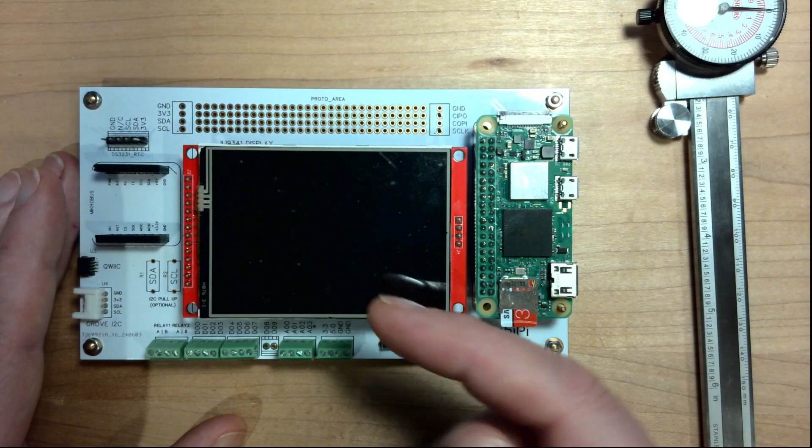One of the other things I really want to have in the final version is the thermostat wires that are coming in—24 volt AC coming from the wire in the wall—and I want to use that to power this. This obviously isn't powered by 24 volt AC, so for now we'll just use USB and run that down to a wall wart to power this in the first iteration. I can get it mounted, make sure everything works, and then develop a power transformer or power converter that I can mount up here that will take that 24 volt AC and convert it to 5 volt DC to drive everything. That might be one of the next videos—figuring out power.

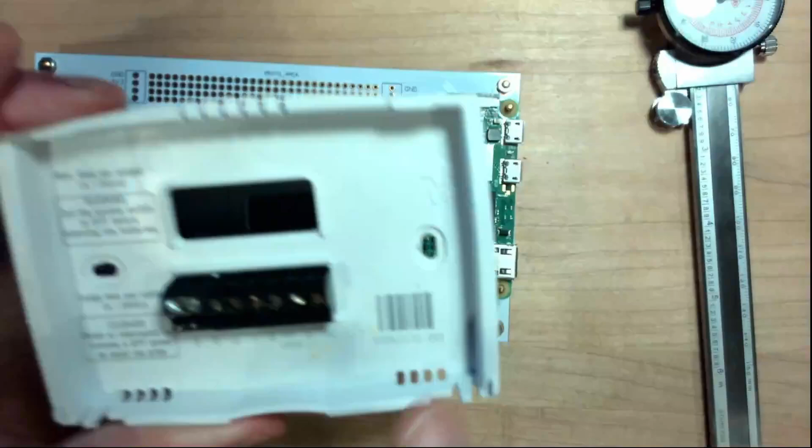But the point here is I'm not going to worry about power right now. We're just going to assume USB power, using these screw terminals. Now these screw terminals have to have wires that go through basically a hole in the back, since there's a hole in the wall that this runs through. Typically you've got a couple of anchors, and this just goes straight through the drywall, usually punched through with a drill or screwdriver or whatever. So we need something that can hold this, that will mount to these, and has a hole in place that allows wires to come up and into here.

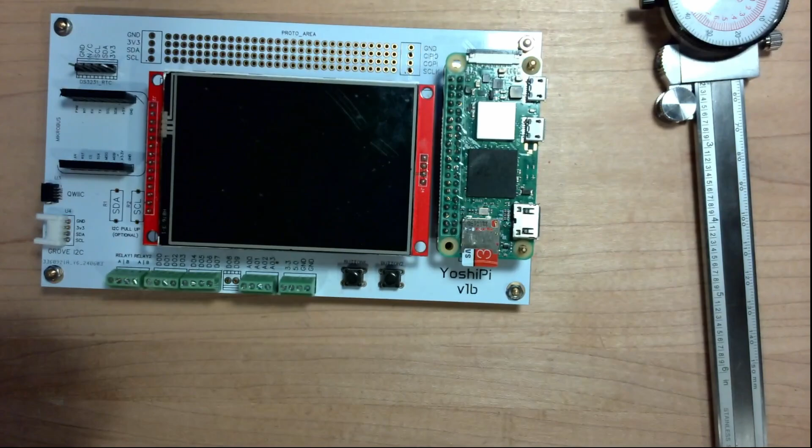We've got a few different requirements to meet, but otherwise not a whole lot. One thing to think about is the way this works: it gets mounted to the wall, and then you take the thermostat and it snaps in. It's got pins that bayonet into these connectors. So you mount this, and then you can just walk up and slide this on. Obviously I don't have that kind of connector here, so we have to have wires that loop up and hook into here.

If I'm mounting something onto something like this, I need to be able to put the screw holes in, but obviously they're going to be behind this board, so that won't work. So I have to build something that I can mount to the wall, and then this will mount into it after the mount is on the wall. That's a little bit of a challenge.

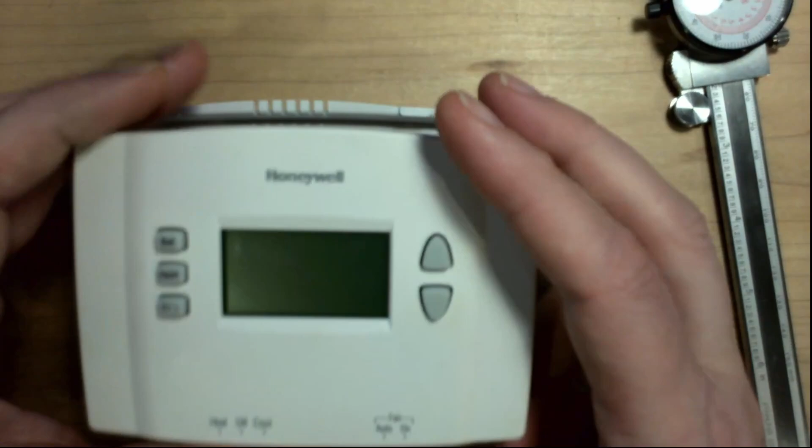Since this is a prototype, we don't need to do a full enclosure and face. I'm not worried about that because there's no point spinning all of that if we then turn around and make a smaller board. Really all I need is a backplate board that holds this. Yes, it'll be ugly and just hanging out there on the wall, but for a prototype that is just fine. So today we're going to do the 3D design work in CAD for a backplate that meets all of those requirements. Let's enumerate them real quick.

Just a backplate. It needs to have mounting holes at this standard configuration distance. I am going to go horizontal because I'm designing this thermostat horizontal. Though it would be interesting if you could make it so it could go horizontal or vertical, so the user could decide how they want to mount it and use configuration to rotate. Constantly thinking of new requirements for this. But for this one: holes for horizontal, a hole for the wires to come through, and some way for the backplate to mount to the wall, and then this to mount to the backplate.

One other thing to consider is this is just flat. Obviously it's on standoffs right now, but if I took those standoffs off I can't just mount it right to the backplate because wires have to come up and around. So we need to have some space between this and the backplate, whether it's using these standoffs or something else, that is to be determined.

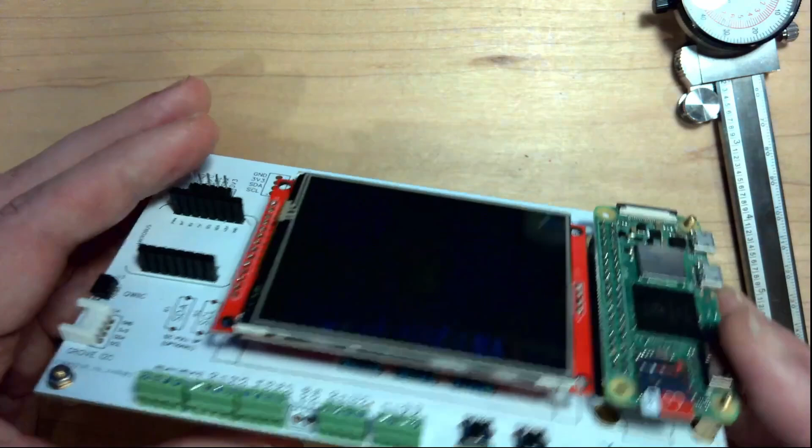So let's open up Fusion 360, which is my choice of design software, not for any particular reason other than I know how to use it.

The first thing we need to do is create what's called a sketch. So I'm going to create this sketch. I can open up the right view here. So I'm going to create a new sketch, and in fact it's already created this one called Untitled. You can't do much with it until we actually save it.

So I'm going to call this YoshiPi, YoshiStat, Proto, Backplane. All right, and it's going to save it off, and I can shrink this, I think. There's got to be a way to do that so we don't have to eat up a bunch of real estate with this. I know I can do it, I just don't remember how. There it is, okay, perfect.

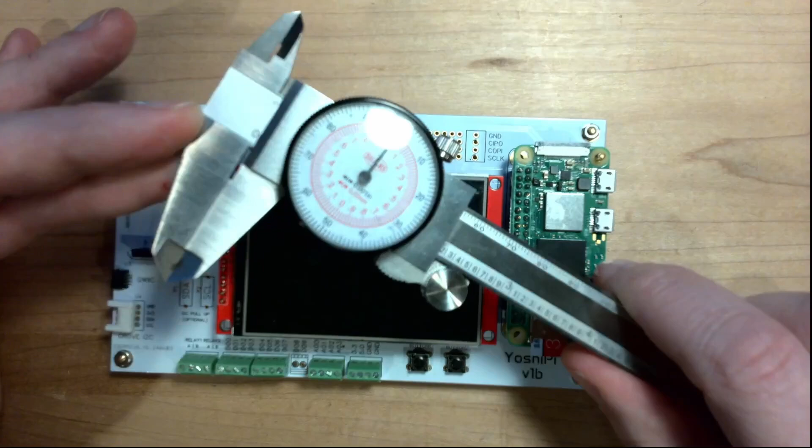Really the only tool I'm going to use here is a caliper, for basically all of the measurements that I run across. And I think that's really the only tool we're going to need today.

So I know that it needs to be the size of this. What I typically do is, now the temptation might be to just design the back plate here, but my experience is that I usually like to at least model the thing that's going into the enclosure or backplate first, and then design the enclosure around it. I do have some 3D designs for this hardware already done, but I'm going to not use those. I'm going to just design them here so you can see that process.

Now there's a whole bunch going on here, buttons and screw terminals and connectors. Those largely don't matter for what we're building, so I don't need to worry too much about it. I do have to come up onto these, so I might put these in, you know, the power and the relays and the digital outputs.

Maybe, maybe not. The reality is, if we have a backplane that doesn't extend up past this, I won't need to worry about it, but we'll decide as we go. Point being here that I'm going to design at least a very rough sketch of this hardware first, and then we will design the backplane around it.

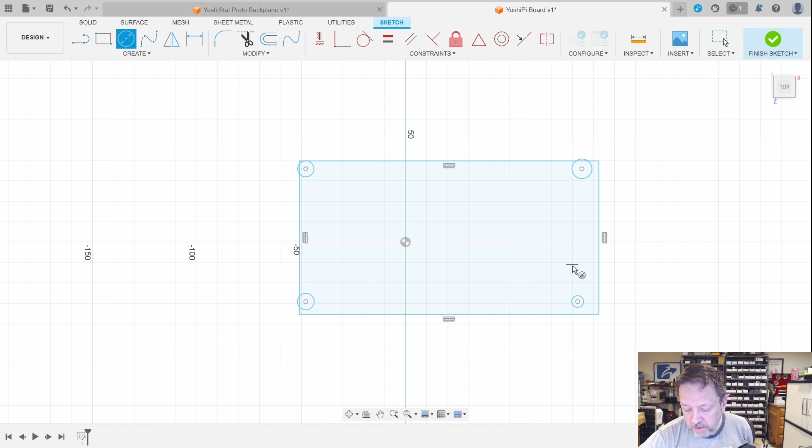So we've got some screw holes, right? And we actually have the Pi Zero, and we have the display, and we do have, oh, we can just put these in. Just broadly, we've got these connectors, right? So these are our shapes of what I think we care about for this. In fact, it's more than we care about. I'm not overly concerned about the display, but we can put it in.

Now I'm going to start putting some constraints onto this drawing that will make it look more like reality. So this is where measuring will help. In fact, trying to decide if it's worthwhile to have the camera showing measurements too. Why not? So hold on one second while I add that in.

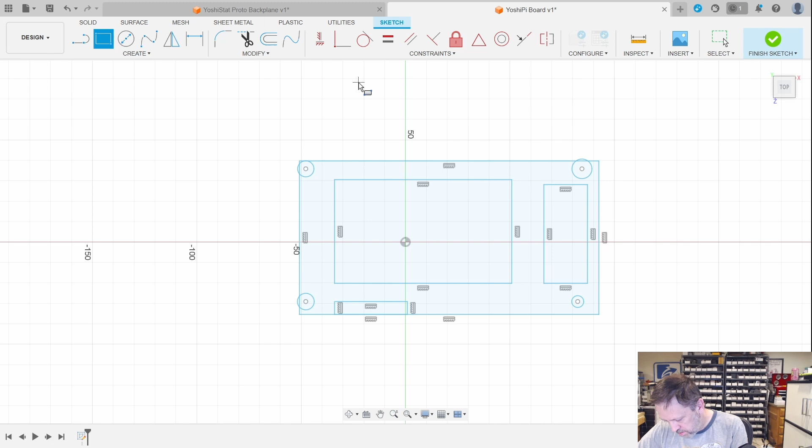And then I'm going to center this on the origin. So the origin is here. And if I center it, it's going to basically constrain it, and the outline will turn black so that it is in a fixed location. The easiest way I find to do that is just say the dimension from one edge to the center is the overall length divided by 2. And again, edge to center is the overall length divided by 2. And then that centers us.

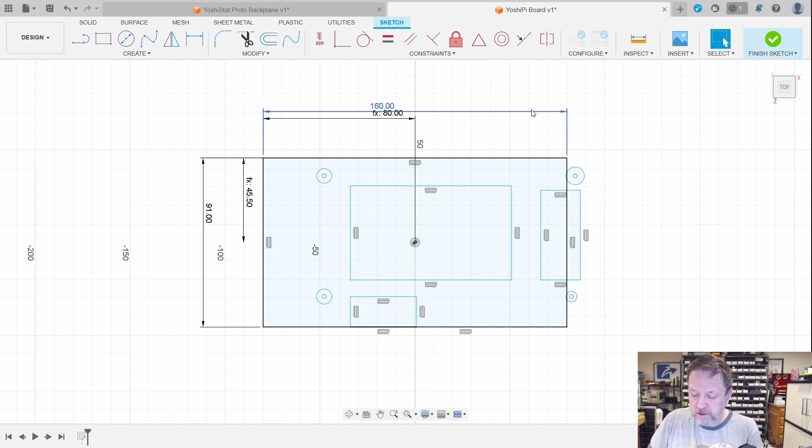Now the screw holes, that is a 4mm hole. So I can say that this is a 4mm hole, and I know that this one is the same as this one, same as this one, and same as this one. So all four the same size at 4mm, and then let's measure it to the edge. So that's 3 to the side of the hole, to the center of the hole, therefore it must be 5, right?

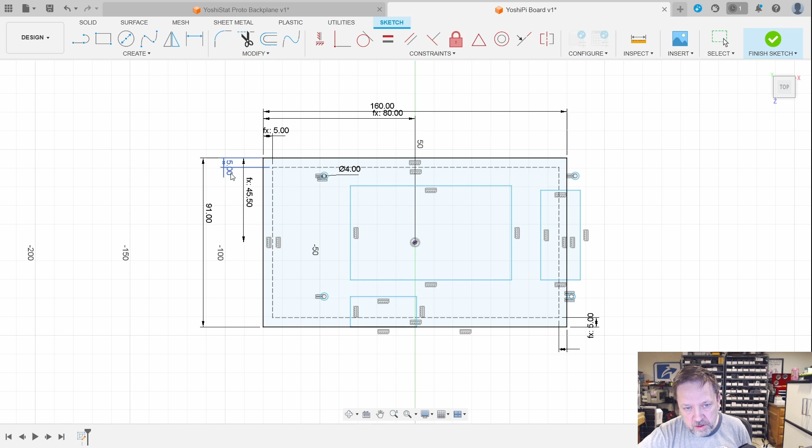So what I'm going to do is I'm going to put in another rectangle, but I'm just going to make it a construction line. Here. And now I can take these circles and put them right at those corners. There's a little bit of a zoom on what it is that we're looking at.

Next, let's deal with, let's do the display. This display is 55. Yeah, we'll call it 90.

Now, when we're laying out things like this, I've got multiple things that I need to lay out. Generally speaking, I like to lay them all out from the same edges. So I'll use one edge for X and one edge from Y. So basically, all my layout, I will come from here. So measure this direction to them and this direction. Because if I measure this direction sometimes and then measure this direction other times, what you'll end up with is if your initial measurements were off even by like a millimeter, you can end up with some weirdness in the middle when things get close to one another because you're measuring off of different edges. So if you always come off of the same edge, you're going to do a lot better.

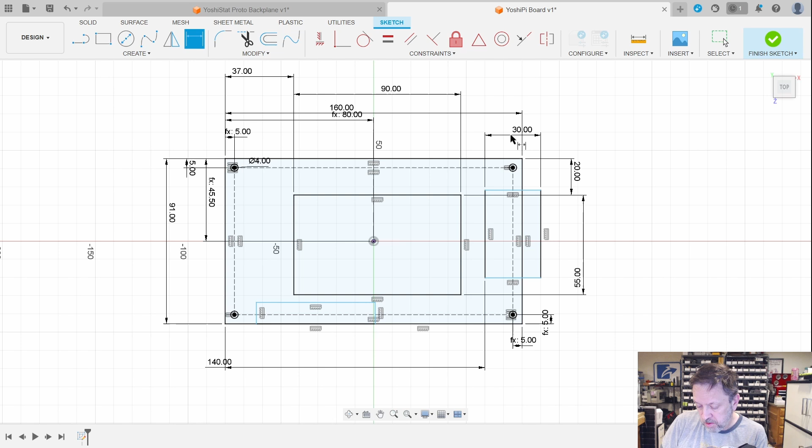Put the Raspberry Pi in here. And already I've got a measurement that's incorrect. Let's try this one again. That's better. And again, you could always go look up the actual dimensions for things that are common, like this Raspberry Pi. I'm sure the dimensions on this are published.

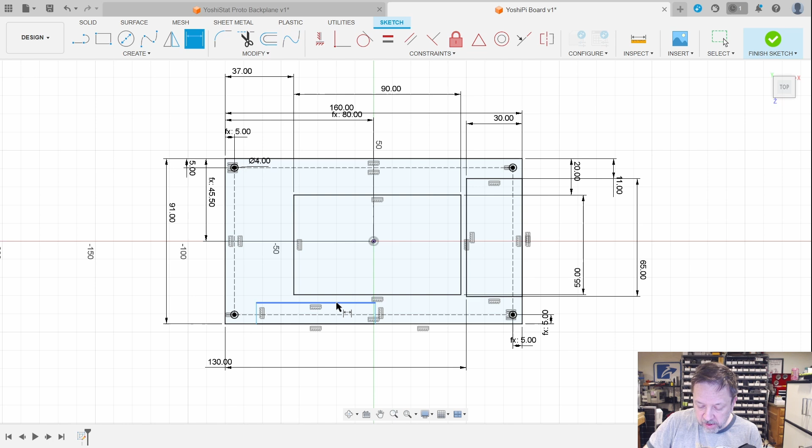This rectangle here is the block of screw terminals. You can see we've got several of them here. I'm just going to do this as one big block, because for what we're doing, it doesn't need to be really a refined model. All right, so I think that is all we actually need for doing this. So that's our sketch. Now, let's actually build the board.

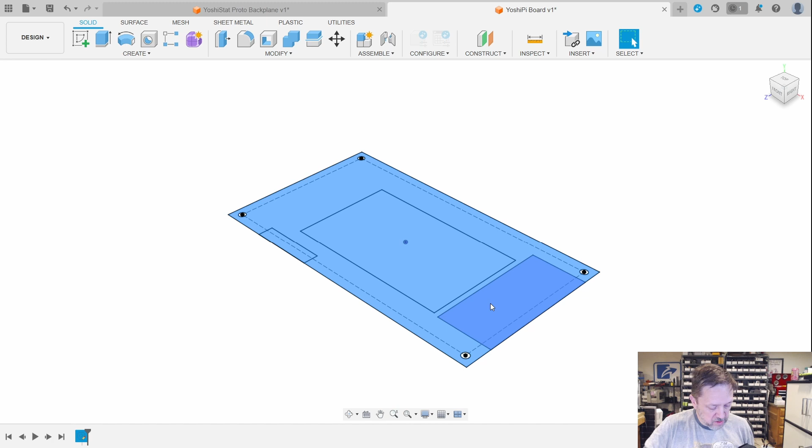So the board itself has a thickness of 2 millimeters. And let's just put these on. And you'll see that these are not going to be refined at all. So that looks like that's, say, 9 millimeters. So what I'm going to do is say this. We're going to come up 9 millimeters. And that's it. That's all I'm going to do.

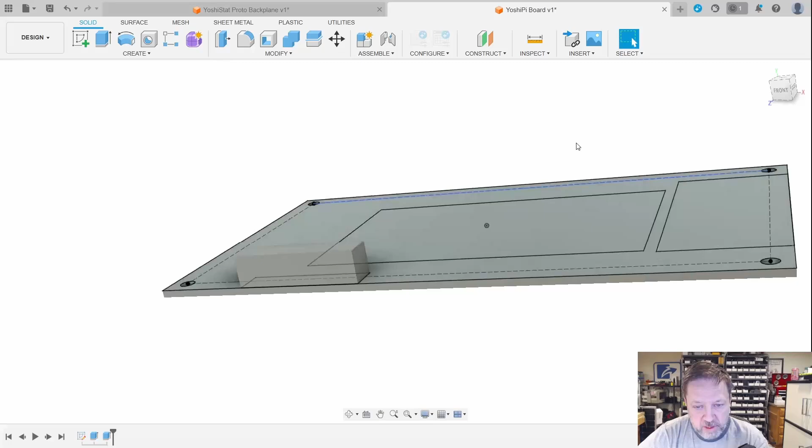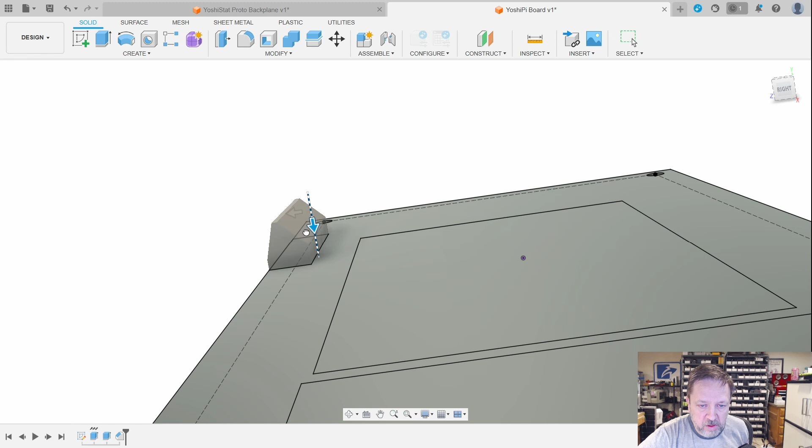Now, if you wanted to get somewhat fancy, you could do something like this. We could take this and let's chamfer it. And I could do a 2-direction chamfer. And it comes in, I don't know, maybe like that, and maybe like that. And we could do the same thing over here. Nope, not rounded fillet, chamfer. Something like that. Again, that doesn't really matter. The angles there, that's more refinement than we actually need for our model here.

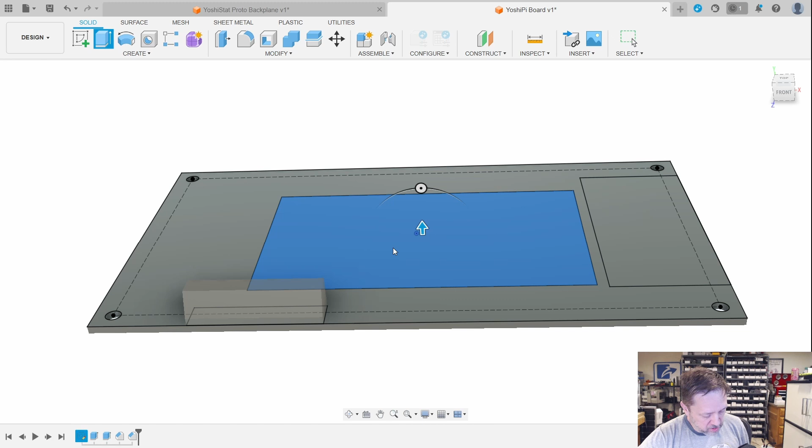Let's look at the display. The face of it is up 17. So I'm going to just come up 17. And the face of the Pi, we'll call it 10, close enough.

The measurements here don't need to be terribly accurate because, again, I'm not building any kind of an enclosure over the top of it. Really, the things that are important are things that we need for mounting. So the hole sizes, the distance between holes, the board size itself, the board thickness. Really, those are about all that we need to be terribly accurate on. So there's our board.

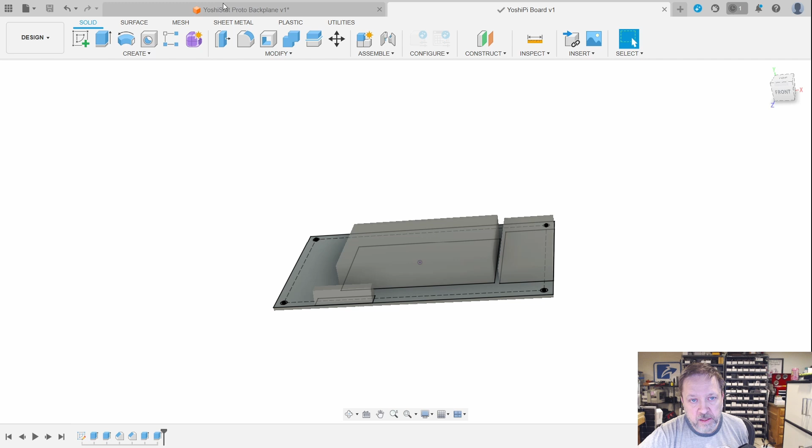I'll save that. Now I'm going to come back here, and this is our back plane. And what I'm going to do is come back over and show this, and I can take the board, and I'm going to drop it in. So now this board has been imported into this drawing, right? So now I can build my other stuff around it. So this is where our back plane is going to be.

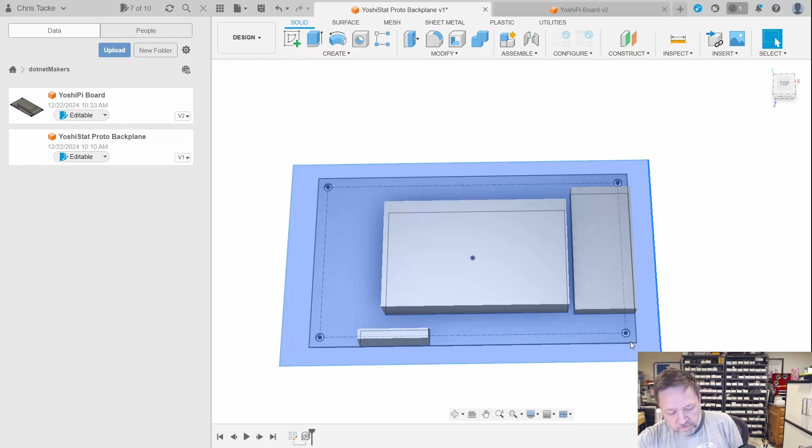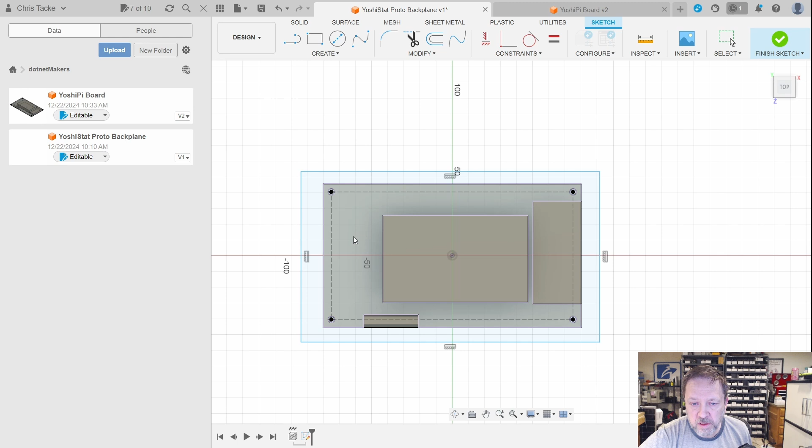So now let's edit that sketch again. What we can do is we can project onto it, and to do that, move some things around in the timeline. Let's go back and now edit the sketch. Okay, so what I want to do is project onto this board. Really, that's all we care about, right? We can project that. Then if I hide the board, it projects. It's missing this edge and things like that, but really it's got the 4 edges that we care about and the holes. So I think that's going to be good enough.

If we make that 5 millimeters, so it'll extend 5 millimeters out, that should work out just fine.

Oh, looks like the dog wants to go out and go to the bathroom. So I will be right back. If you have any questions, go ahead and throw them up into the chat, and I'll answer them when I get right back.

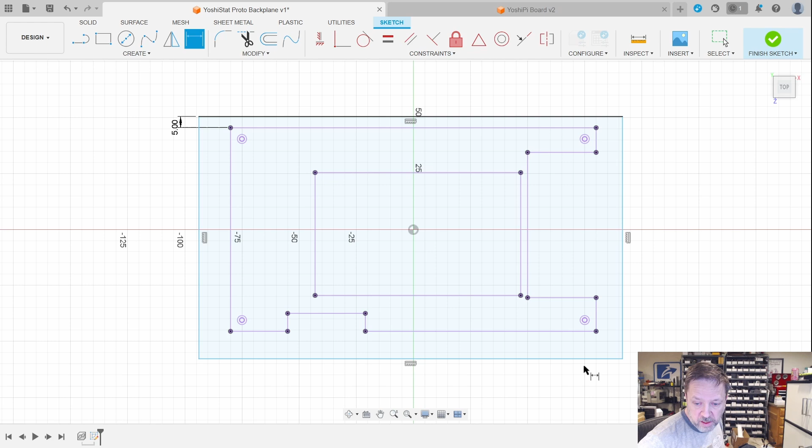All right, and we're back. Okay. What were we doing now? We were doing this.

Now I could make parameters for this whole thing so that I could adjust these, but this is so simple that if I need to change these, I can just change the actual dimension. What did I do?

Okay, so our backplane is going to be basically a 5 millimeter margin all the way around, bigger than the YoshiPi itself. Now I kind of want to have some sort of a ridge because just a flat piece of plastic is pretty floppy.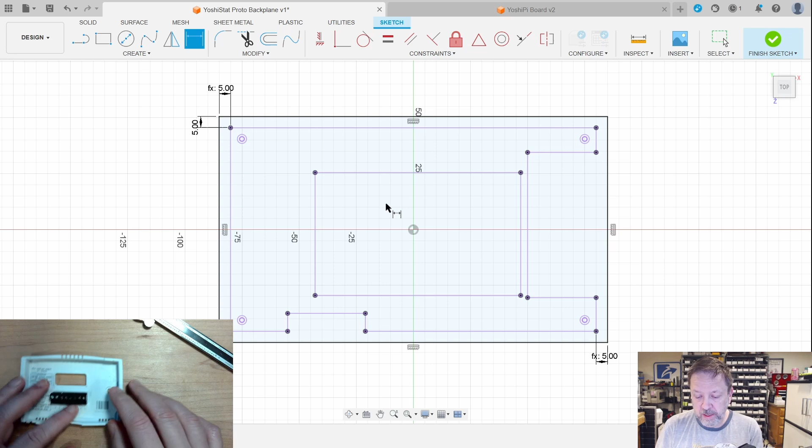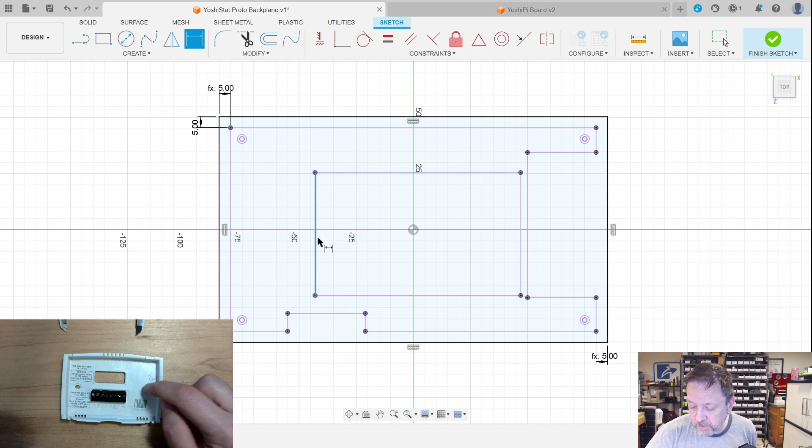Let's do a couple of things. First, we want to put the mounting holes. So let's actually come back and measure this. So we know that these holes, let's go center to center. Looks like it's 82 millimeters. Now you can see that these are ovals. They're not just a round hole. And it allows you a little bit of wiggle room to straighten things out.

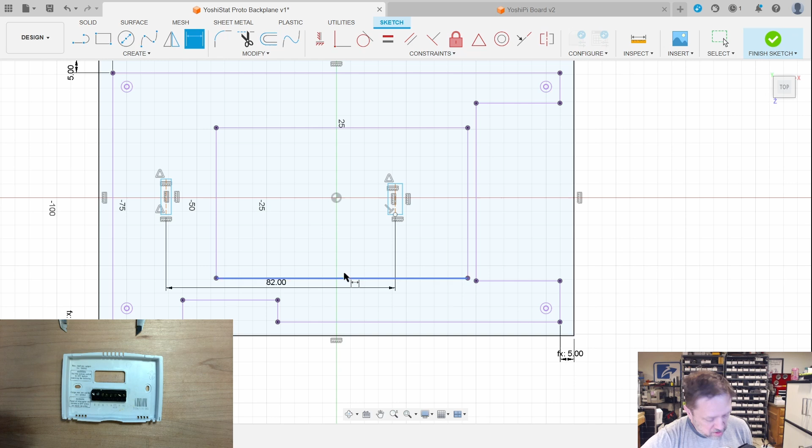And we're going to do the same thing. So I'm going to put these here, here, dimension. I guess we need to put a line in because it was center to center. And our dimension from this center line to this center line was 82 millimeters. And I'm going to center those. So from the origin to here will be that dimension divided by 2. So now we're centered across the middle.

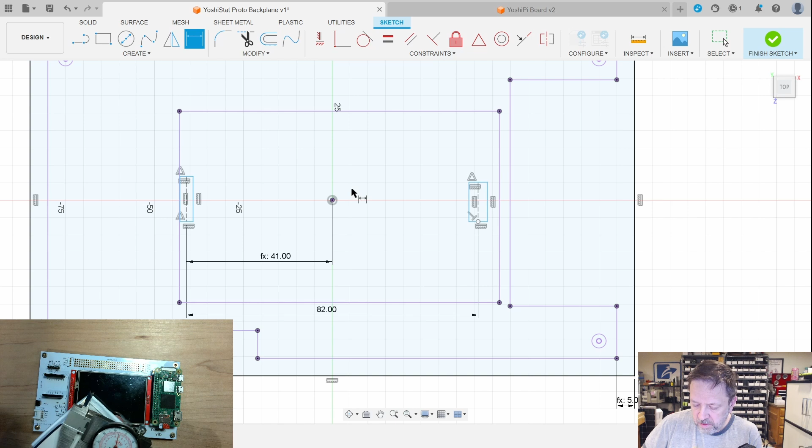Just quick sanity check. If I did that and I put the hole right at the edge of this, it's in the display. So that seems reasonable. All right. Let's set the size of those holes. I think this is actually probably a square with half circles. I'll show you what I mean there. But they're 4 millimeters across.

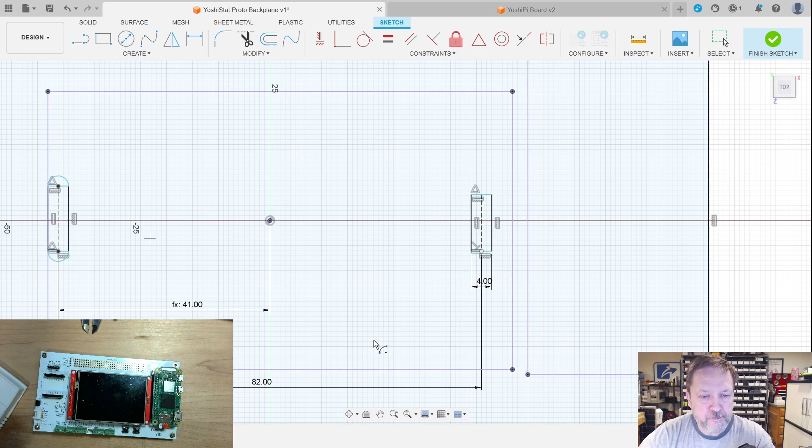So if this is 4 and this is equal to that. And now let's do an arc. I guess we could do a center point arc. Nope. Needs to be a standard line. And I think the dimension from here to here is probably the same as this. Now we need to put these on the center line.

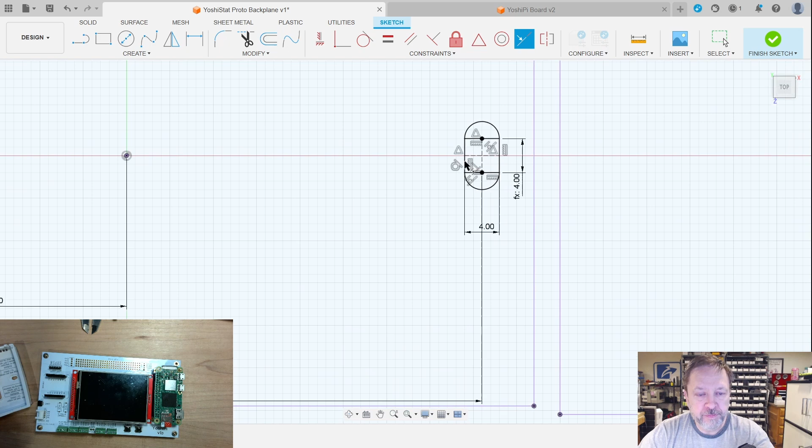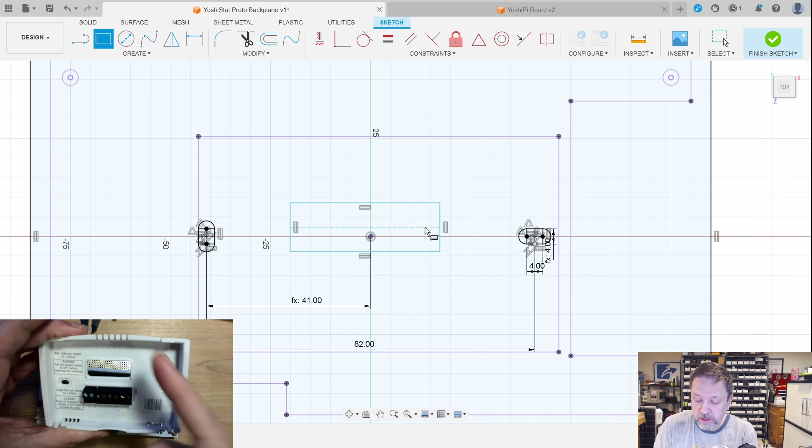I already screwed that up, didn't I? This one's horizontal and this one's vertical. So let's remove that one, and do them the other way. There we go. And we might as well make the hole for the wires here. You can see on this one, it's not centered. Actually, it's not centered either direction, but I don't think it makes a whole lot of difference. We could have this mount a little higher on the wall where the wires are lower, centered. Let's just center it. Why not?

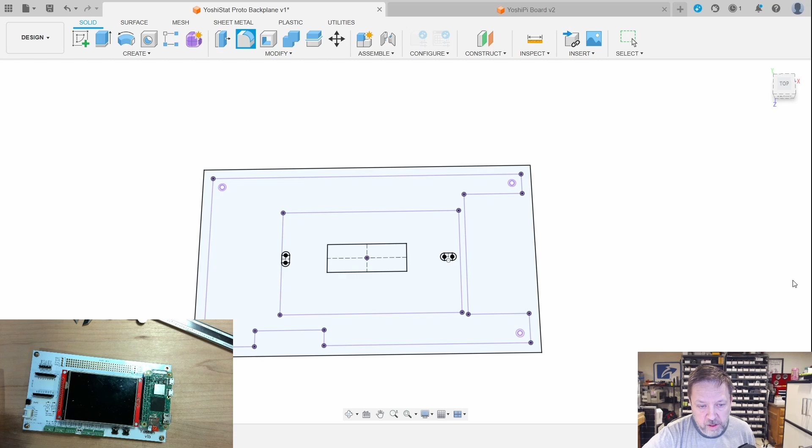Similar size hole. What is that, about 15? Yeah. 15 by 35-ish. Let's call it 15. Hey, let's just make it 40. And we can even be a little bit fancy here. And we can fillet those, right? Nope, didn't want to do that. I want to continue working on the sketch. So from here to here. Let's just do a 3. Yeah, 3.

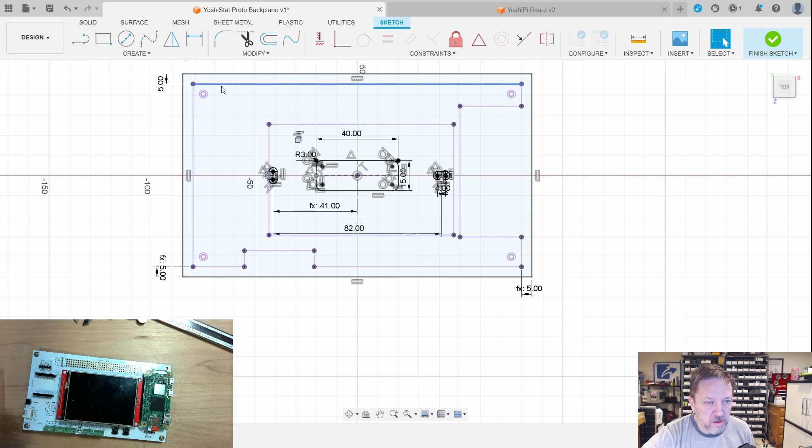Why is it allowing that? Ah, there we go. All right, so that gets us our hole for the wires, gets us our hole for our screws. Now we just have to figure out a way to mount our board to this. So what I was thinking is I almost want to have maybe some sort of slot that, let's say, the top fits into, and then we slide this down and it clips in. So we want some sort of a standoff to keep it up off the back, and that can be in all 4 corners, basically like these, but we'll just build that right into the enclosure.

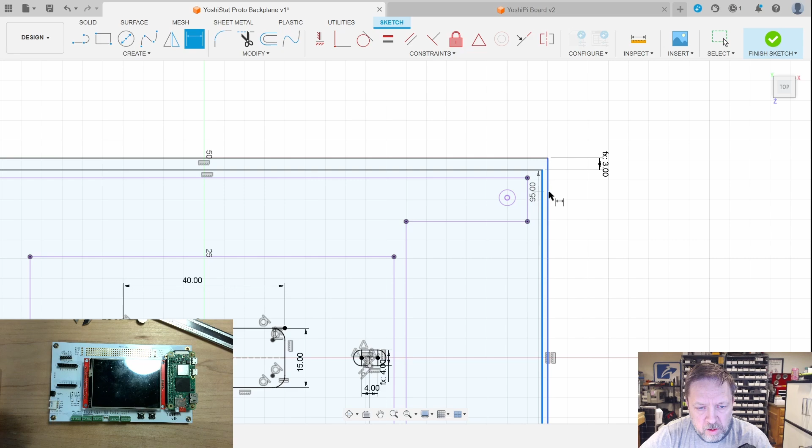So I guess we could put these into the enclosure with screws. A lot of ways we could do that, but let's just do this. I want to make a rectangle around the border to make it rigid. This will make a little bit more sense when I actually extrude it. Let's see. So from here to here, make that 3 millimeters. Why? Because of that one. All right.

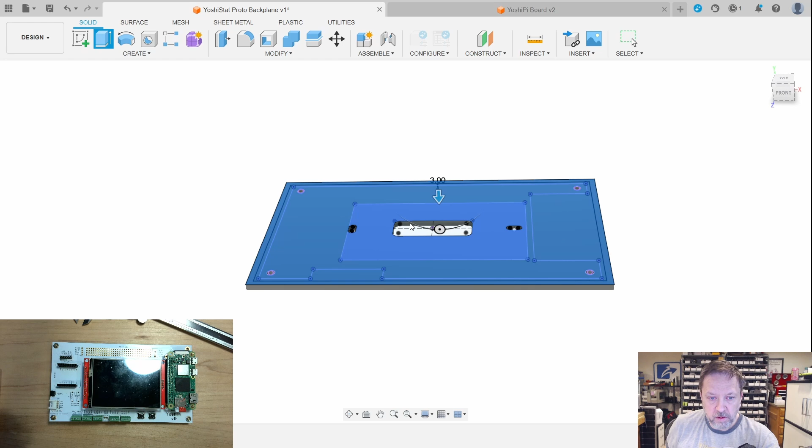So let's go extrude this just as we have it so that you get a feel for kind of what we have. We can do this in stages. So let's say we want to extrude this and make it 3 millimeters thick. So we kind of have a plate that looks like that. Now these holes, they don't necessarily need to be there. We could fill those in, but we'll worry about that as we continue this.

Then I want to take this one and I want to extrude it in the positive direction. Let's come up 2 millimeters just to start with. So you can see if I shut off that sketch, we have this ridge that runs all the way around now, right? And this will add some rigidity to the plate itself. Now, that is not enough. We know we have to have space behind the board.

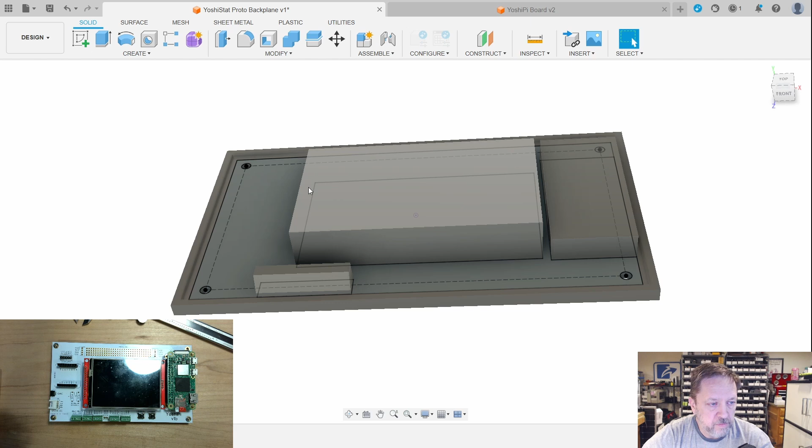And in fact, if we show the YoshiPi board sitting here, we know that we want it to be moved up, right? So in fact, let's move it to where we want it. Move the whole component. Come on now.

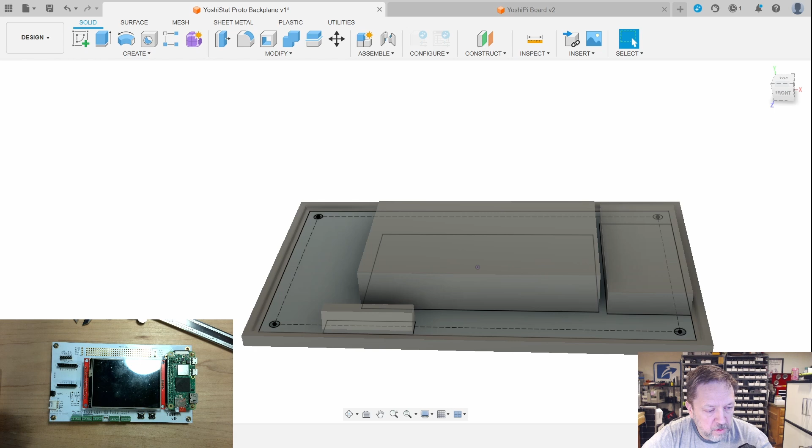Oh, interesting. So what it has done is it has merged our two bodies together, which I do not want. That's why I'm having trouble here. So if I come back to here, hide that.

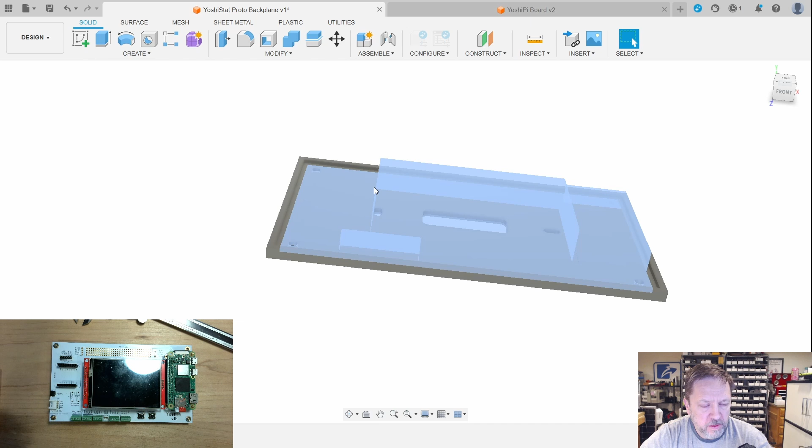Somehow I grounded it. Now I'm trying to figure out how to undo that. There it is. Okay, now let's try this again. I want to move that. There we go. That's what we wanted. So now I can move this up and down, right?

And really what I want to do is I want to move it, I think 0 is the faces of them combined. So up 2 will be sitting flat. And then we want to come up another 5. So that should leave us a 5 millimeter gap between the back of this board and the front of this, I think. Let's go take a look.

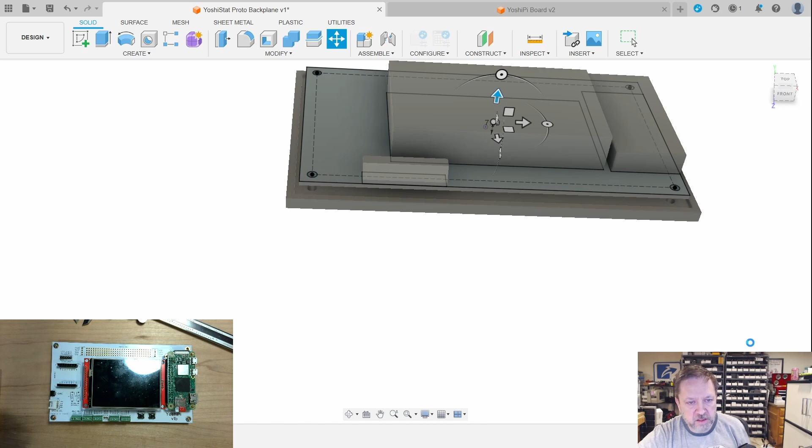We inspect from, say, this to this. It says, yep, it's a 5 millimeter difference between them. And 5 millimeters is plenty for those wires. All right.

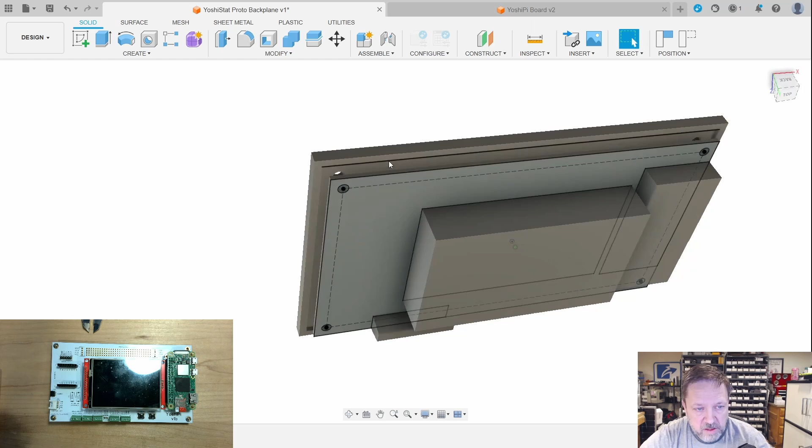So this is kind of what we're building right now. Now we have to have a way to attach this board to the back plane. I'm thinking a reasonable way to do this is if I had a slot or some sort of way that this upper edge could slide in, and then some flexible tabs at the bottom that would hold it in place. So let me kind of show you what I'm thinking here.

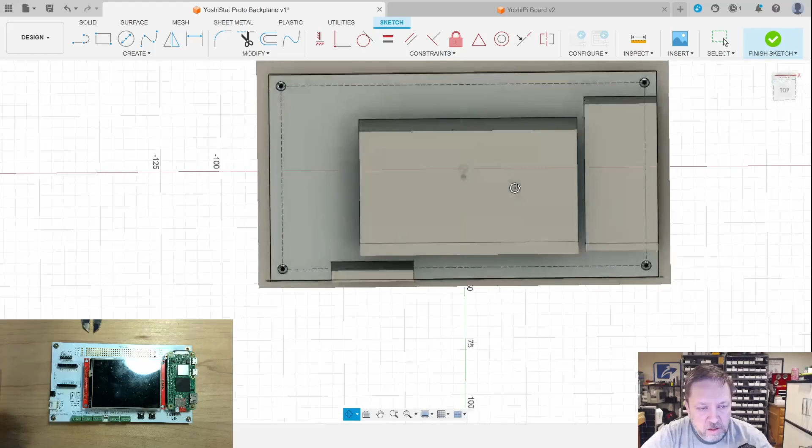Create another sketch just for this mounting. And then let's project this back plate onto it. And I want to project these edges. I do that, and then I hide all of these.

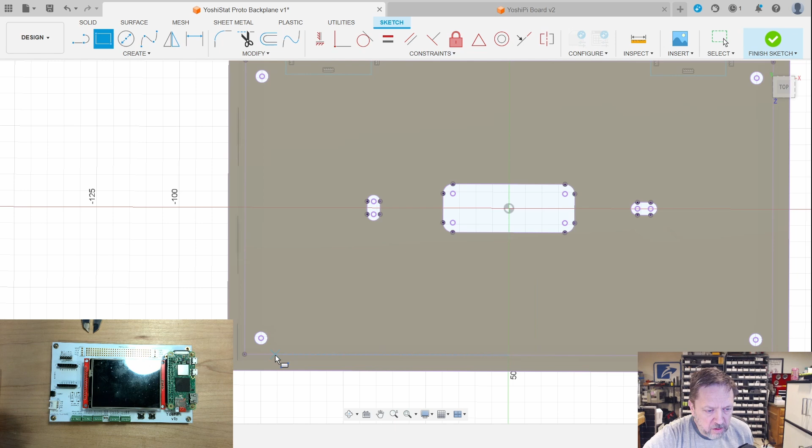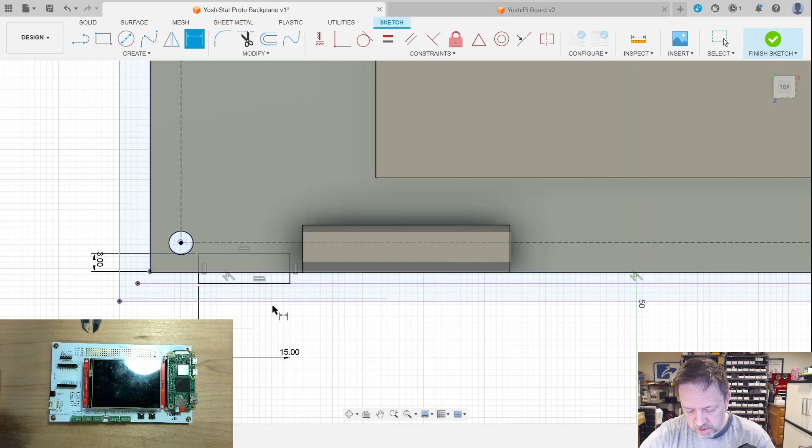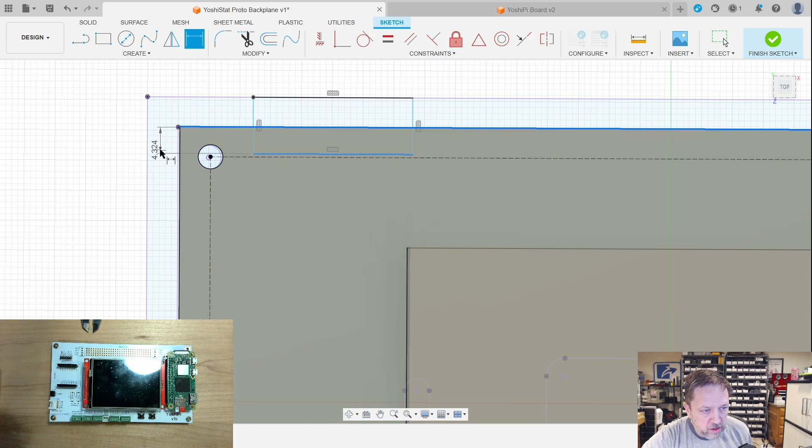I do something like, let's just do this. All right. This might not be real obvious what I'm doing here yet, but hopefully it will be in a minute. All right. So what I want to do, let's worry about the top edge first here.

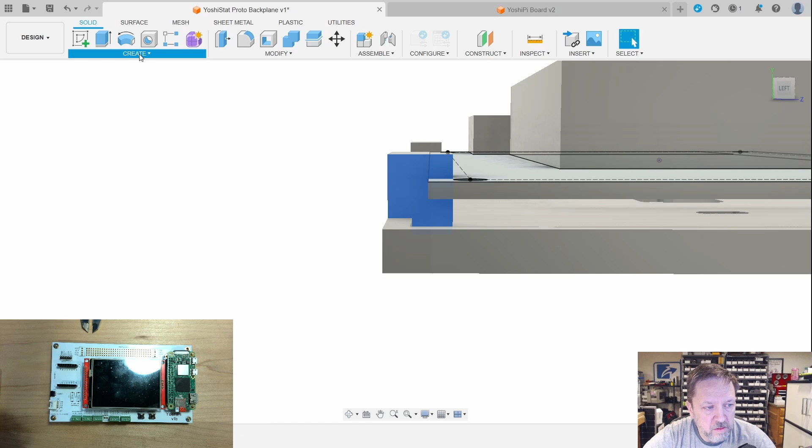So let's do that. So we're going to bring some posts up like that. And if we show this again, so let's create a sketch on this. And we'll project this edge onto it. And actually, let's project this on as well. Right, so we've got that.

So what I can do, let's come down, say 0.25. Sure. Seems reasonable. So look at what we get when we do this. I'm going to show this body again. And I'm going to hide the YoshiPi.

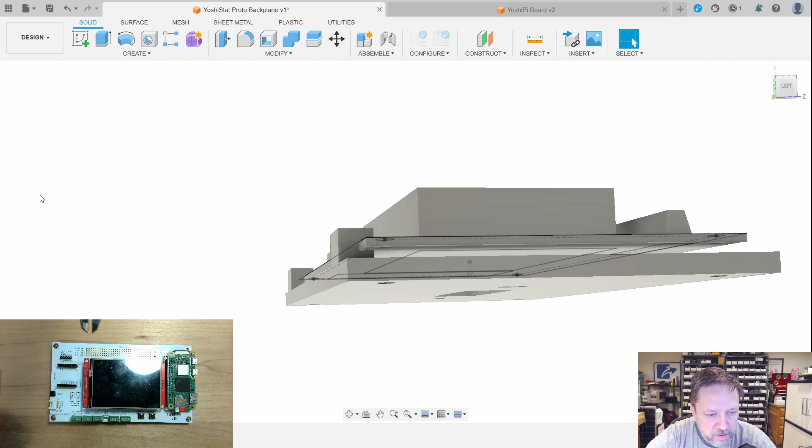And then I'm going to take this and this and extrude those. I'm just going to drive it all the way through. So that cuts a notch like that, right? And the YoshiPi fits right in there. And we've got, if I zoom in, hide that sketch so it's a little clearer.

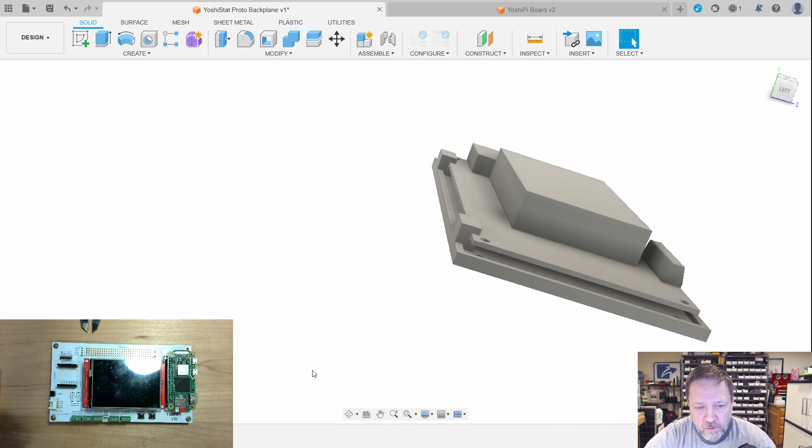You can see we've got this 1/4 millimeter gap. When we 3D print this, that's going to eat up that 1/4 mil, no problem. Gives us a little bit of flexibility to move around, right? So now we're mounting it, holding it here. And I'm going to do something similar on the bottom, but there I want a flexible tab. So kind of you slide it in up here. And then at the bottom, it'll have a tab that moves basically down that the board can snap into.

So they're going to be thinner, right? We don't want it to be thick like this because this isn't going to flex. We want it to be thinner so that it can flex. There's the risk that because we're going to have to print it like this, it might delaminate due to that flex, but I'm going to print it and give it a try.

So let's go back to the sketch. I can hide that again. Show this sketch. Now, these ones we want to project up. You can see already that these ones are thinner. And with a little bit of creative chamfering, we can make it work. So we're going to extrude these up.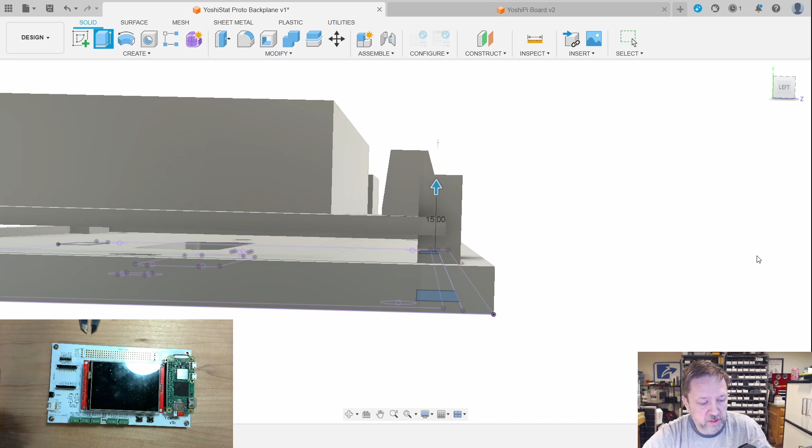Let's show the YoshiPi again. And we want these to come up. Let's say 15. Ooh, not 10, 15, just 15. That's probably more than we want. Let's call it 13. Actually, let's go 15. I'll show you why. Once we thin this out, it looks thick, but it's not gonna be all that chunky.

Let's hide this. In fact, let's go back and work on this sketch because we can, oh yeah, we can just blow that all the way through too. That works great. So I think it was this extrusion. Yes. Let's move it. And let's edit it. This single extrusion we will use to go through all of it.

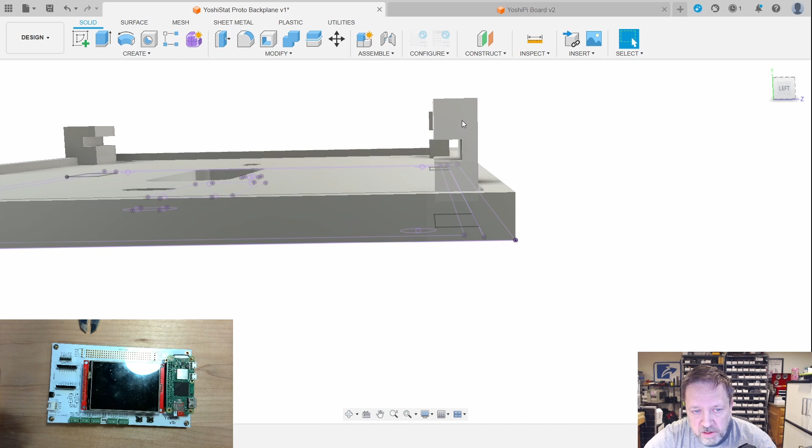So now we have all of these. And this looks a little sus here, right? It's really chunky up on top. But there are a few different ways we could do this. We could use a chamfer and thin it out, or we could create a sketch and thin it out. Let's do a sketch. What the heck? The great thing about doing 3D modeling is you can be very creative and do whatever you want. So let's do a sketch on this.

And let's do just some lines. We're going to come from, say, the middle here to even right here would be fine, right? Let's make that 1.5. And it might be as simple as that. Let's do an extrusion of that all the way through.

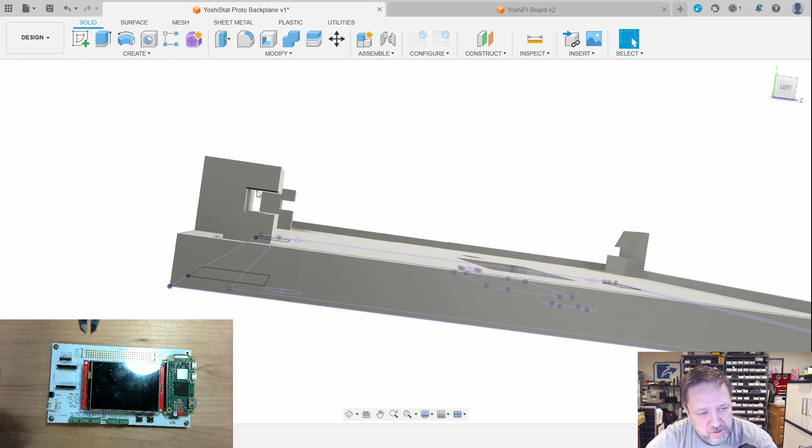So now we have this notch up here, and it comes down and it clips in. Now this notch is fairly deep, and I'm concerned that when you try to push the board in, you're going to run into here. I want to give a little bit of space. So let's do a chamfer on this. And let's come up. Now let's come on now.

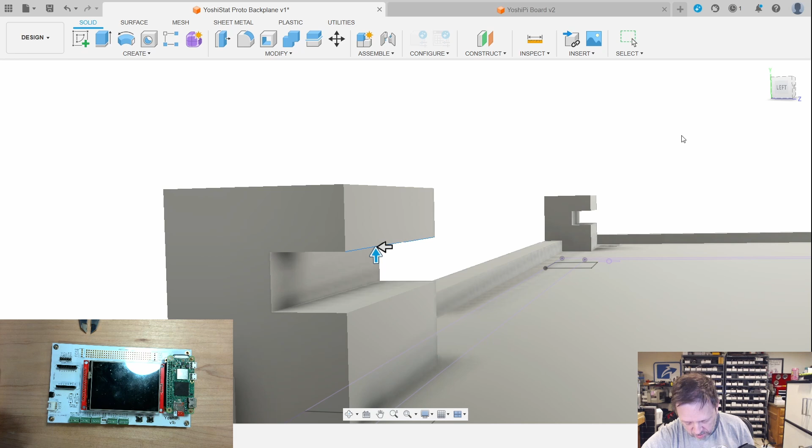It doesn't want to let me. Okay. So let's come in. 2.

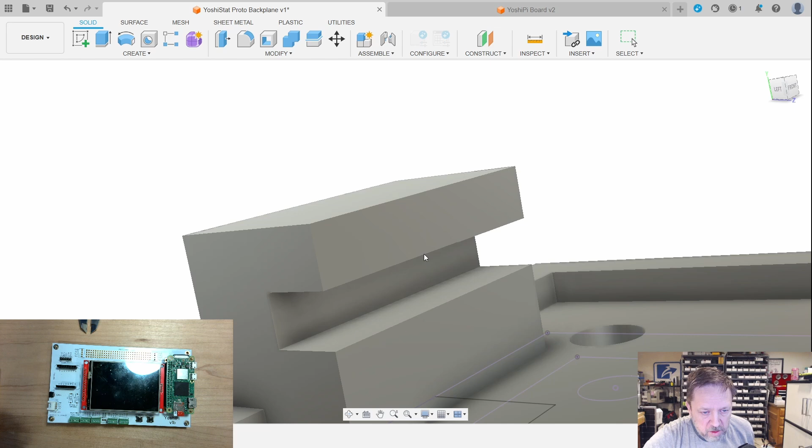Let's try that. And I want to do the same thing on this one. Where'd it go? I've lost it. There it is. On that edge. So hopefully that'll let us slide that in, and then it'll snap down. Right? This will clip in just like this.

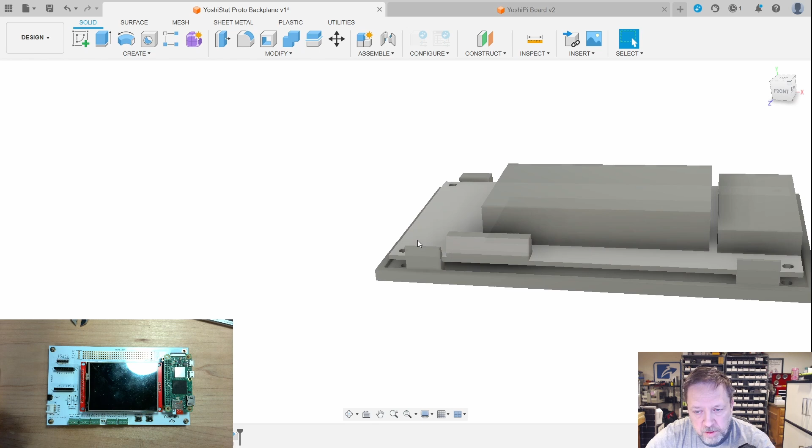The one thing that might be problematic is side to side, right? So this direction in that back plane, there's nothing holding it. Now it can't go too far one direction because we're going to hit this screw terminal on this clip. But I also am not overly concerned with it, right? Movement probably isn't going to be all that problematic if it does.

If you were concerned about it, you could certainly bring like this edge up so that it sits recessed, something like that. But I think what I have is fine. Now, as a final thing, I want to go look at this and then look at the board. So the clip's going to come in here near this hole, which is clear. Same thing here, it's clear. Here, there's nothing. And here, there's nothing. So that all looks good.

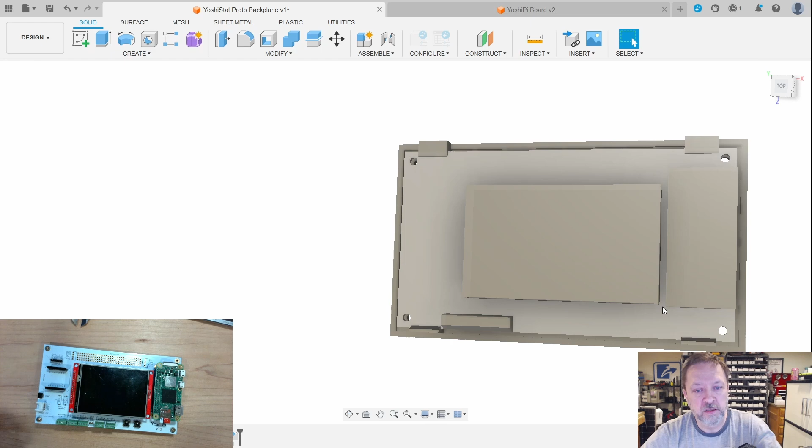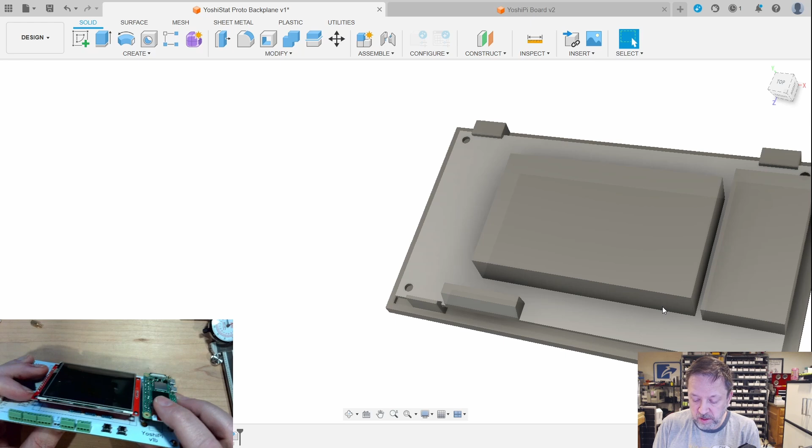Backside, I think we're fine. In fact, so these are 8mm standoffs here. So it's got an 8mm standoff, but we only have 5mm between it and the board. So we want to make sure that these pins sticking through aren't going to be a problem. I don't think they are. Those only look like they're about 3 maybe, and 2mm sticking through. So we've got plenty of space for wires to come through all of that. I think we are good.

So let's hide that. And so this is what my proposal for a first version of our backplane is going to look like. So save it. And now I'm going to export this body. It's a single body, as a mesh. So I'm going to basically create it as an STL. And we're going to call it the YoshiStat Proto Backplane.

Now I'm going to save this. Well, I'll have to create a folder for that. It's fine. All right. All right, now I'm just making sure that it got exported and all of that.